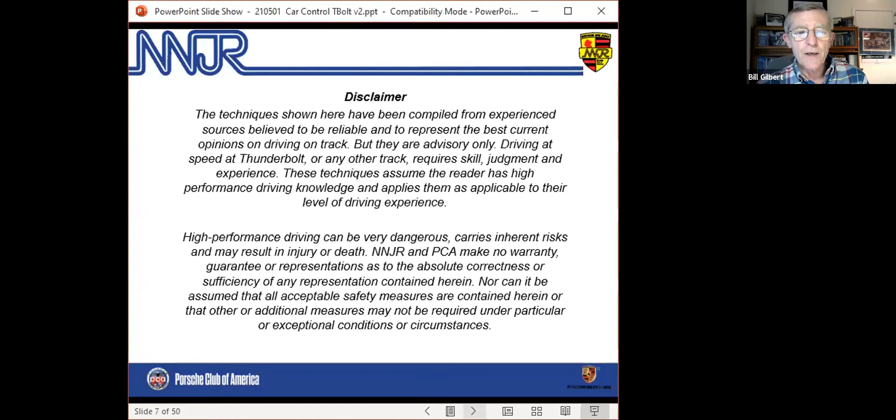Okay, so we're going to talk about car control. Normal disclaimer, anything you try based on this is your fault. So what is car control? You gave actually better definitions than some of the ones I have here, but the car does what I ask it to do, or expect it to do, right?

I love to include the reminder from Dennis Mascio that says, remember, the driver's guiding this 3,000-pound car. You're not telling it what to do, you're suggesting what it should do. You're guiding it. We don't, as a driver, have ultimate control. A car's going to do what it's going to do based on the physics of the situation.

Another way to think about car control is, hey, the car feels good. Well, what is that? What is feel? Well, it means kind of no bad habits. It inspires confidence, it's not scary. And we'll talk a little bit more about that in just a minute.

If we think about what the car is doing, and we think about handling, the classic definition of handling includes three things: balance - does the car feel balanced? Responsiveness - does it turn when I turn the steering wheel? And then the amount of grip.

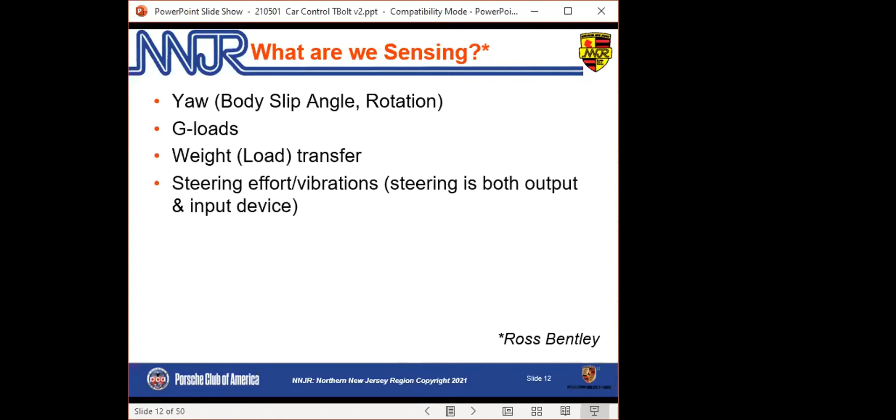Hey Bill, if... I could just make a point of this, Tom. I know this is also a pre to the theme, the Thunderbolt. I know you're going to touch on it, but since we're talking about this feel and grip and so on, I found, and I'm sure you're going to touch on it later, the Octopus is a fantastic place to practice that, because you have understeer and oversteer conditions all built into the entry, the mid corner and the exit of one turn, and it's slow speed, so there's not a lot of risk.

It's a very user-friendly place to practice understeer and oversteer and working your throttle, and you can feel things there. The track - people complain, oh, wears out my tires? Well, guess what, that's exactly a great place to figure out what are the tires telling you. What does it feel like in your butt as you're going through that corner? So I'll leave it to you. Thanks.

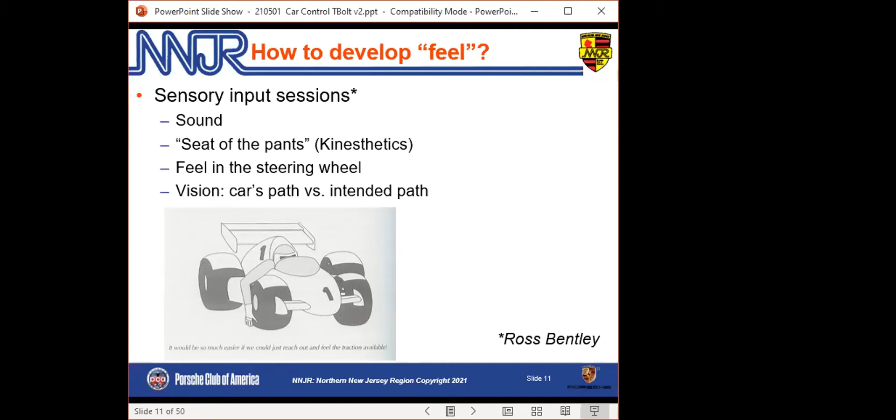No, Tom, that's a great comment. I was going to mention it in passing, but I'm glad you emphasized it, because you said it better than I was going to, and it absolutely is.

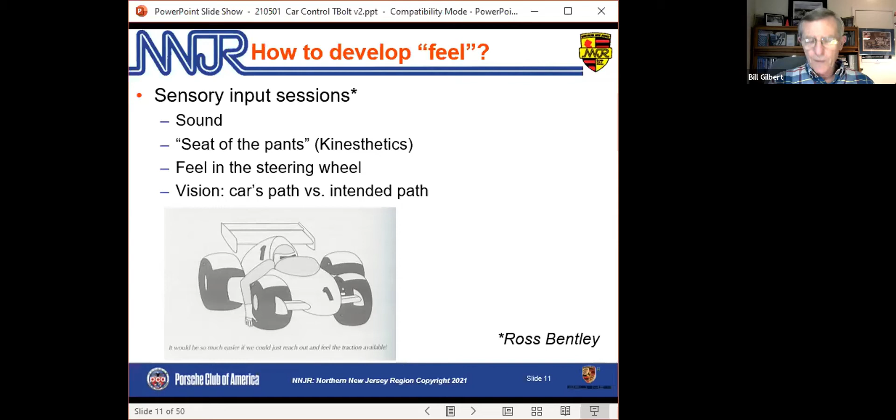Later, I'm going to talk about other ways, other places. There are very few track corners where you can experiment with the limit, and really consciously induce understeer or oversteer and get away with it, or at least that you want to do that. But the Octopus absolutely is a place like that. You can push a little too hard and feel the front end go out, or get on the gas a little too hard and feel the back end go out. So Tom, absolutely correct, I'm glad you mentioned it.

Now, I'm not going to spend any time tonight on the technical aspects of what we're sensing when the car is handling. There's all kinds of things. In the slides I'll post on the website later tonight, there's a long appendix with more information of this type. But if you think about how we know what the car is doing, it's not just the yaw angle or the G loads, there's a lot of other things, and that's where the sensory input sessions really come in.

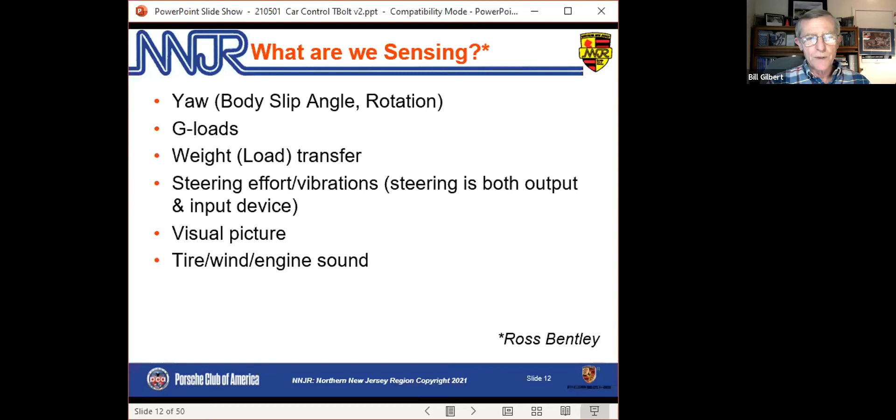I've also been a broken record in the past on deliberate practice, which means practicing in a very organized way: learning the track, learning the car, learning traffic, and then sensory input. If you're learning a new track or just want to get up to speed at an event, this is kind of the sequence you might want to do it in.

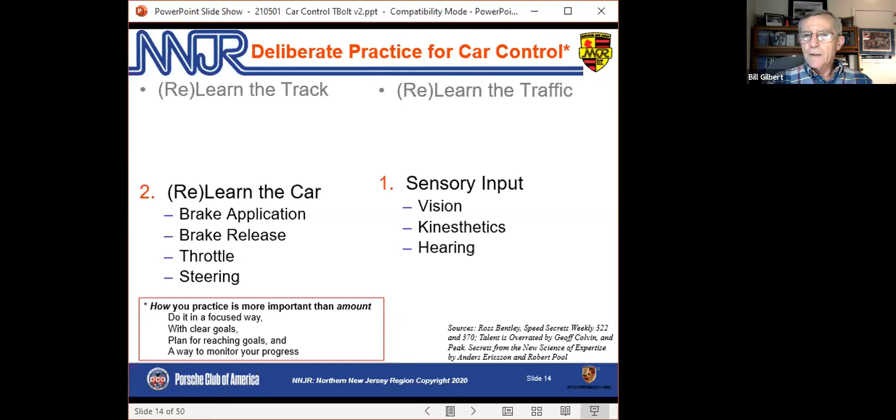But if you really want to think about deliberate practice for car control, the sequence would be different. We would do the sensory input first, with vision, hearing, and kinesthetics. And then we would pay attention to exactly how we're applying and releasing the brakes, the throttle, the steering, and so on. Same idea, you can take the deliberate practice worksheets that are on the website.

I know you can't read the yellow highlights here, but these are the sensory input dimensions of those worksheets. Print out a few Thunderbolt track maps, work on those, take some notes, and you'll improve your ability to feel what the car is doing and know what the car is doing.

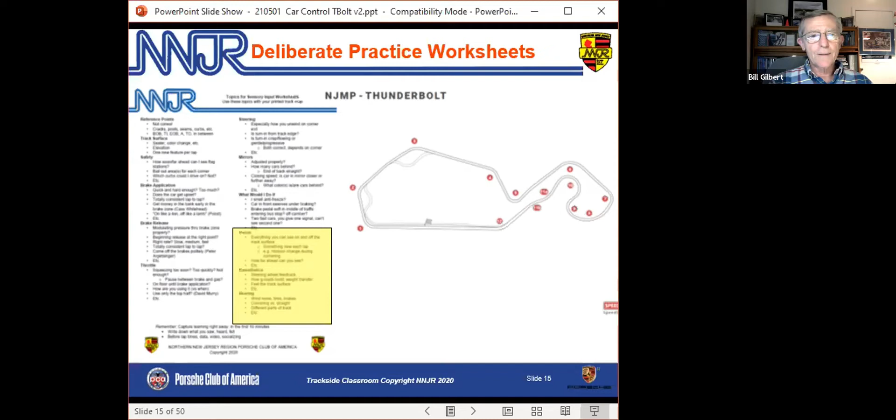And you can't figure out what the car is doing handling-wise unless you're very consistent on the track. If you don't enter a corner at roughly the same speed every time, how do you know whether the understeer was caused by what you did or by something else, if you're approaching it at different speeds, and so on?

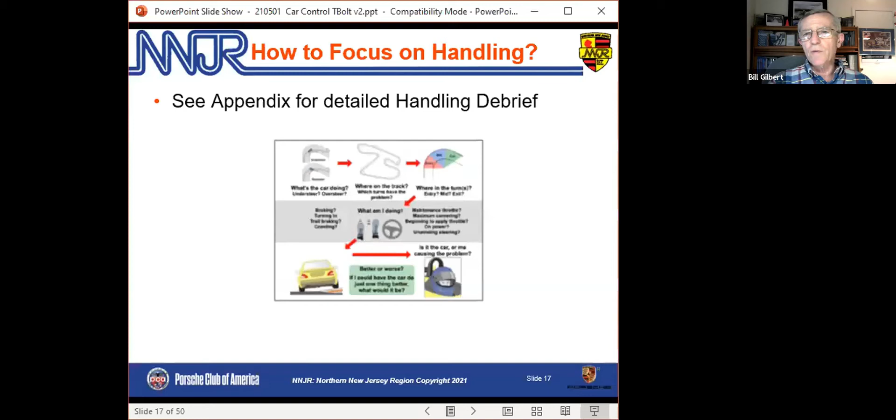If you do have a handling issue, there are ways to diagnose what's going on that are in the appendix. And if you're going to make changes to the car, think about things like balance, and be careful not to just assume that somebody else's setup is the same one you want. In the appendix is a detailed handling debrief from Ross Bentley, a whole set of steps you can go through if you think the car isn't handling right and want to diagnose what's going on.

The simple version of that is: I just came in from a run, was the handling better or worse? And if I made a change, was it better or worse than before the change? And if there was one thing I wanted the car to do better, what would it be? Would it turn in faster? Would it be less nervous? Whatever it is. And you can do this all with deliberate practice.

But this is really more about setup and handling than car control. So let's go back to handling, well, car control issues. Obviously, most car control issues are caused by the driver.

There are all kinds of causes of understeer. We talked about some of these before, right? You can get into a corner too fast, turn the car, and the car won't turn. The classic autocross experience, can easily do that at the Octopus. Get in too fast, try to turn, the car won't turn.

Why is this not going? Oh, I see. If you turn in too fast or too much, again, we're asking the front tires to do too much, and the car will understeer.

There could be too much, or not enough weight on the front tires due to getting off the brakes too quickly. That can happen at turn 5 at Thunderbolt, right? Relatively slow corner, heavy braking area. We come booking in there, slam on the brakes, and then we take our foot off the brakes. And guess what? If we don't do that gently, the front end's just going to wash right out.

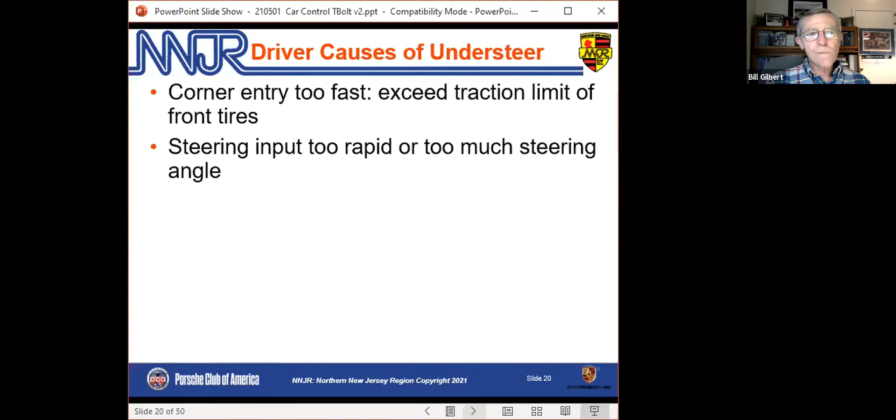Hey, Bill, I just want to interject for just real quick. So for those of you who are instructors on the call, those 3 points are so critical. You can take them to any track, anywhere, anytime. It's how you get rid of that frustrating moment with your student, meaning the student is frustrated and you can't figure it out. You go back to the basics of those 3 points. And I can assure you that 90 to 95% of the time, it's going to be one of those things that you kind of have to systematically go through your brain.

Okay, did they turn the wheel too quick? Did they get on the brakes, get off the brake? Just do your mental checklist and save it for that talk later on. You get in the paddock or at a moment later on when you can fix it. But it's going to be one of those 3 things, and it's so easy to fix. But it's very frustrating if you don't go through that mental checklist and then go through it with the driver.

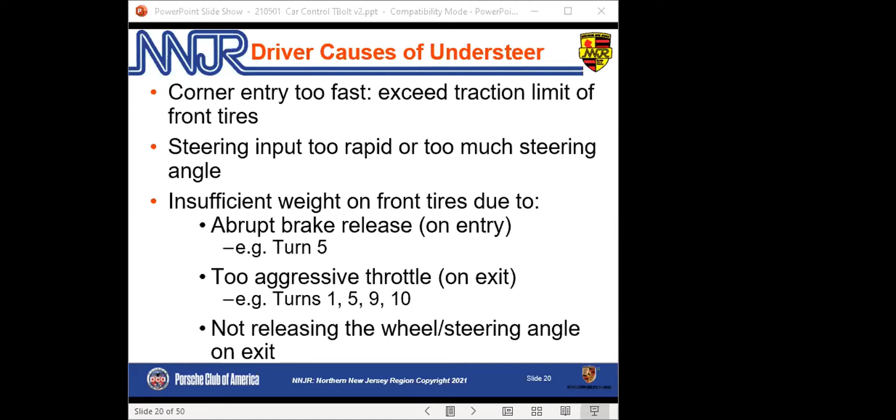Absolutely. And let me reinforce, anyone's welcome to jump in with questions or comments at any time. Please, I don't want this to be one way. So I appreciate Tom jumping in, but anyone else is welcome to jump in, especially if I'm saying something you don't understand or it's not as clear as you'd like.

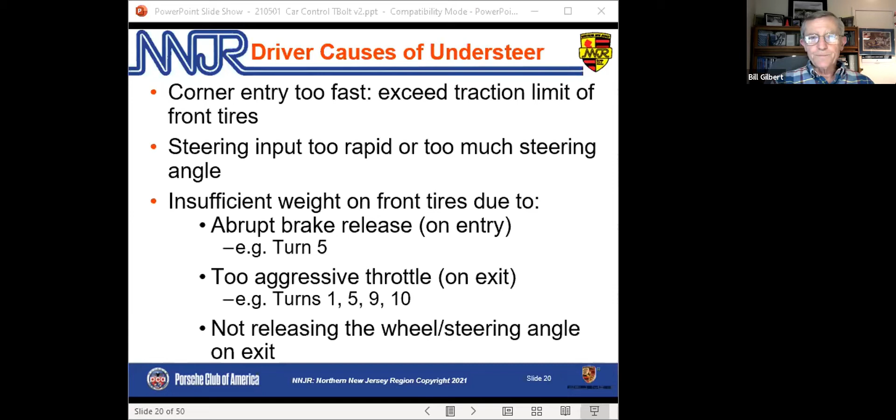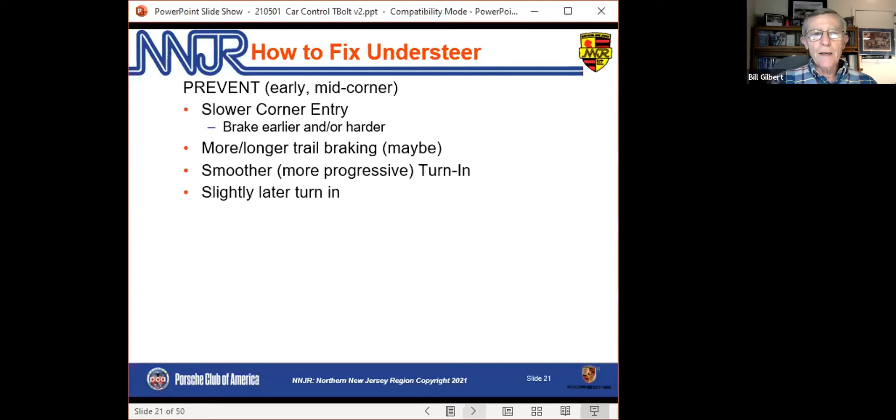So how do we fix understeer? Tom was leading us here. If it's early or mid corner, we can come in slower, meaning brake earlier or harder in a straight line. Perhaps more or longer trail braking will help. Again, depends on the circumstances, right? But often, especially with an inexperienced driver, a more progressive, smoother turn in will help. Maybe a slightly later turn in.

And if it's happening mid corner, then you're getting on the gas too soon. Those of you that were at Pitt Race heard Eric Figueres, the pro who did the track walk for us. He made a comment in the middle of the track walk, I think it was on turn 4, but it could have been any place, which I think is really important. And I've heard it before, but he emphasized it. His point was, when you go to the gas, you should be able to get on the gas hard.

If you go to the gas, but then you have to pussyfoot around and can't really commit to the gas pedal and squeeze it to the floor pretty quickly, then you got on the gas too soon. And that's a really important point. This is just an example. If you're getting on the gas hard, but then the car is understeering, guess what? You got on the gas too soon. Unless you just jumped on the loud pedal. But if you're squeezing the gas pedal properly and the car is washing out, guess what? You weren't patient enough. You got on the gas too soon.

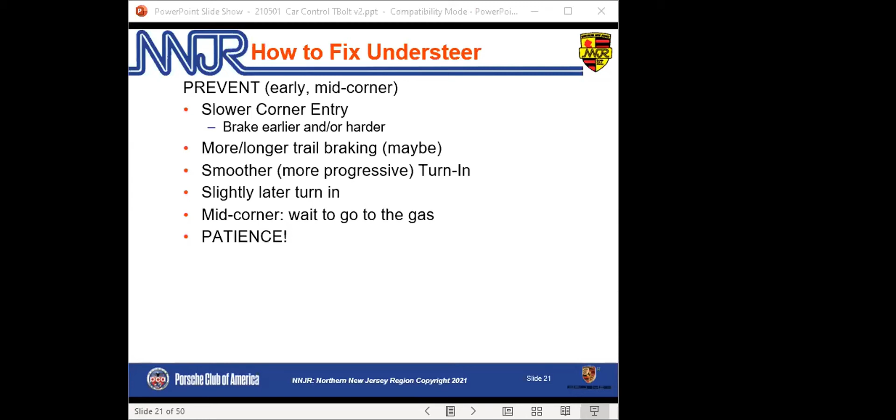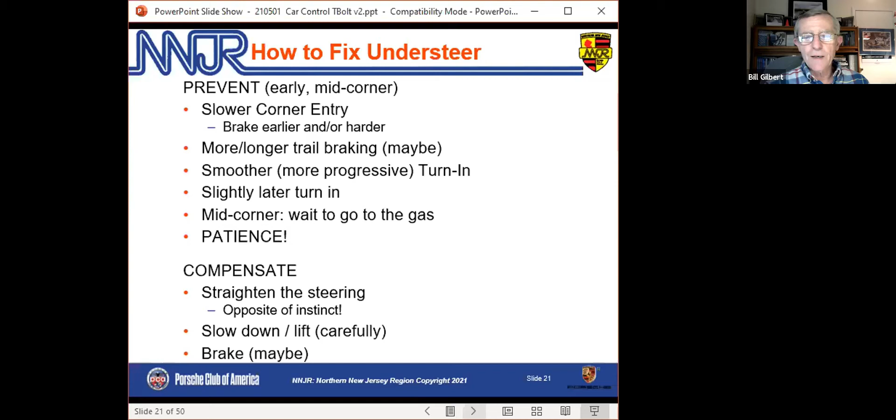Obviously if you're in a situation in the middle of the corner and the car is understeering, all you can do is compensate by generally straightening the steering wheel a bit, which is the opposite of what our instincts are, of course, or slow down a little bit. Maybe if it's a severe case, you might even have to use the brakes, but hopefully none of us get into that situation too much.

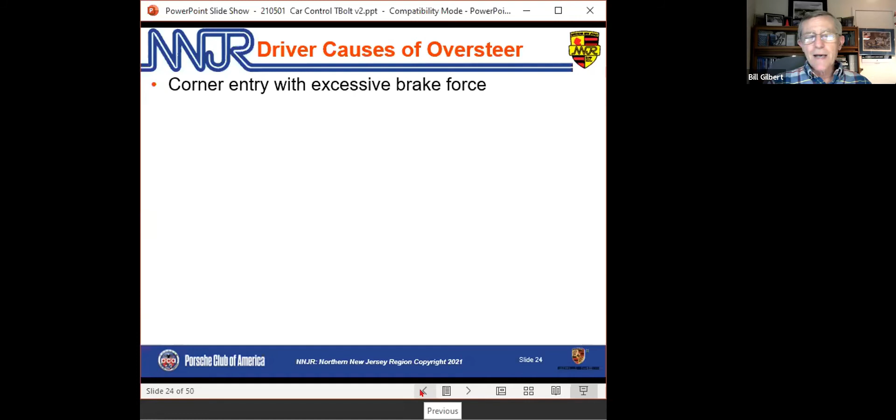It's really pretty cool. So flipping the coin, oversteer. Hopefully this happens less often, but it can happen. If you get into a corner with too much brake and the back end of the car wiggles around, that's oversteer. Turn 5 can happen at Thunderbolt. Turn 9, I imagine the same thing could potentially happen between 8 and 9, actually going in there.

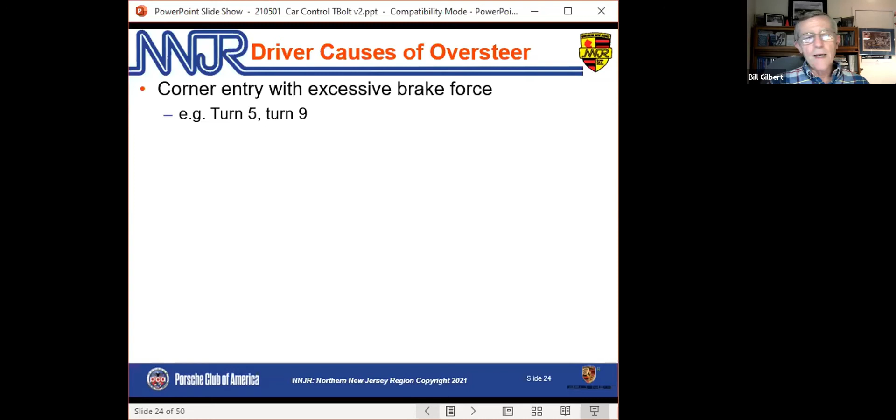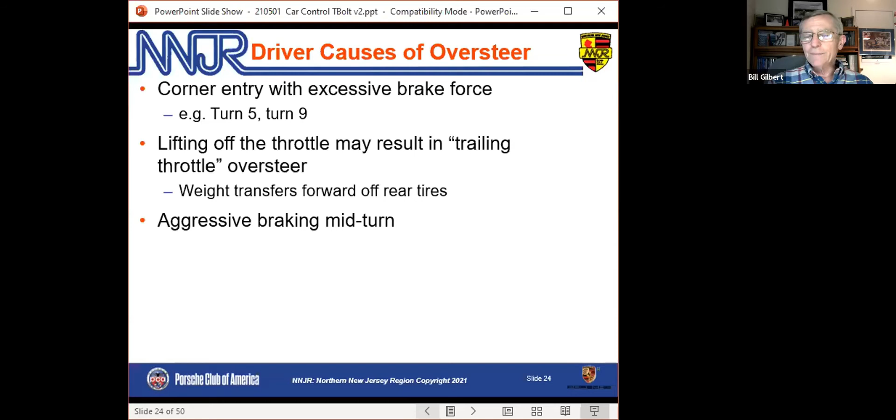We've all heard about trailing throttle oversteer. If you get into a corner and just come off the gas, now we've unweighted the back end, and it's gonna step out as the weight comes off. If you're very aggressive with the braking mid-turn, you can potentially induce oversteer. Sometimes that's actually a good thing if it's a little bit of oversteer—it's never a good thing if it's a lot, because a lot of oversteer is called what? A spin, right? So never a good thing.

Don't have too many downhill turns to worry about at Thunderbolt. And of course, power oversteer—getting on the gas and sliding the back end out. The guys on TV like to do that. It's showy and fancy, it's not fast, and it's not really what we want to do.

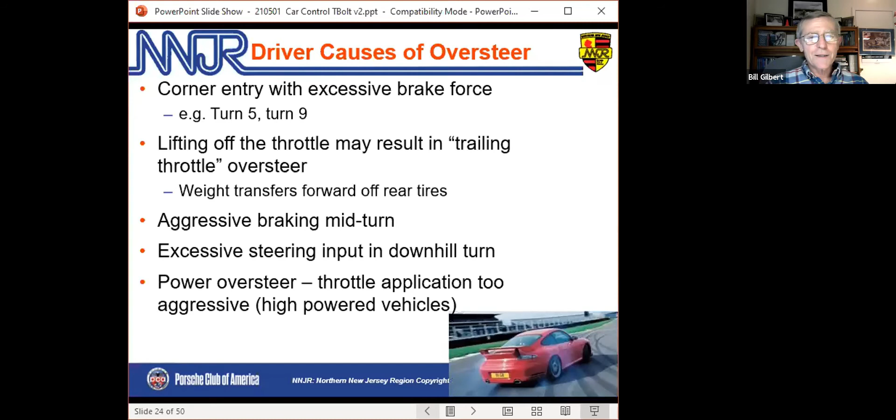So how do we fix it? Generally, most oversteer situations can be solved with less trail braking—never a guarantee—also with a smoother transition off the brakes. Tom was talking about instructing students: a common student mistake is being on heavy brakes and just taking the foot right off the brake pedal, jumping off the brake pedal. Well, that'll certainly step the back end out if you're on too much brake. So being smoother, being more progressive with the steering input can help as you're entering a corner.

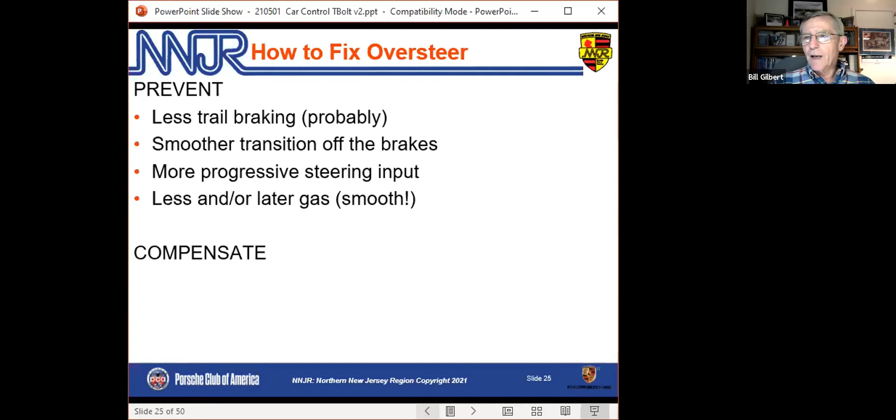And if it's oversteer coming out of a corner, then we have to use either less gas or later gas, or both, and do it smoothly. Now, if it happens in the middle of the corner, everybody knows steer into the skid, but that requires practice, which you can't get on the track, except maybe at the Octopus at Thunderbolt.

Correct, pause, recover—that's where CPR comes from, and it's not something you're generally going to practice on the track, but you can develop that seat of the pants at places like autocross, on a skid pad, at a car control clinic, a winter driving clinic, or even in the snow on a parking lot. That's where these kinds of things can get developed.

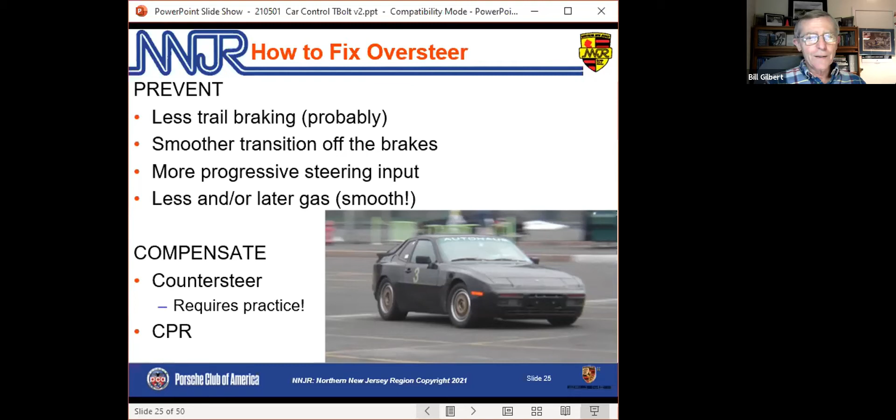This picture on the previous slide, if I can get it—I guess it didn't go back. This picture of my previous car going sideways is in an autocross. So not a great line through that corner, but I at least was correcting the car to get it pointed in the right direction.

So to summarize car control for tonight: we first have to feel or know what the car is doing, and we can always improve that with sensory input sessions. It's really a key part of advancing our skills as we get more experience. If you think about the handling of the car and how it feels to you, you want to think about all those factors we talked about before, and there is a way to get organized on that if you're concerned about it.

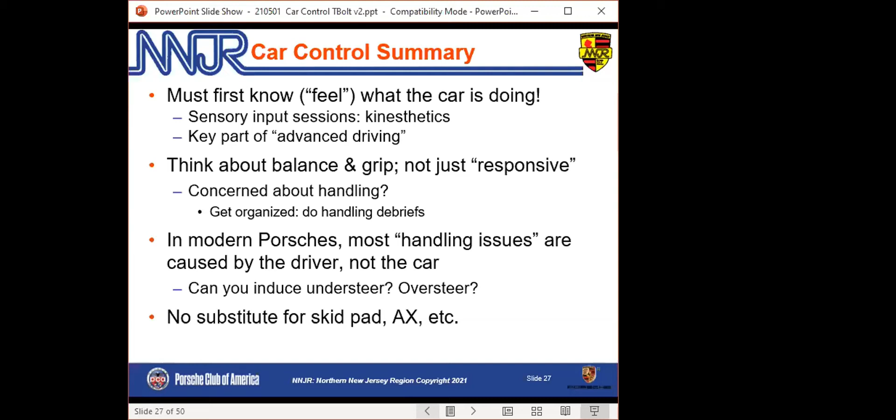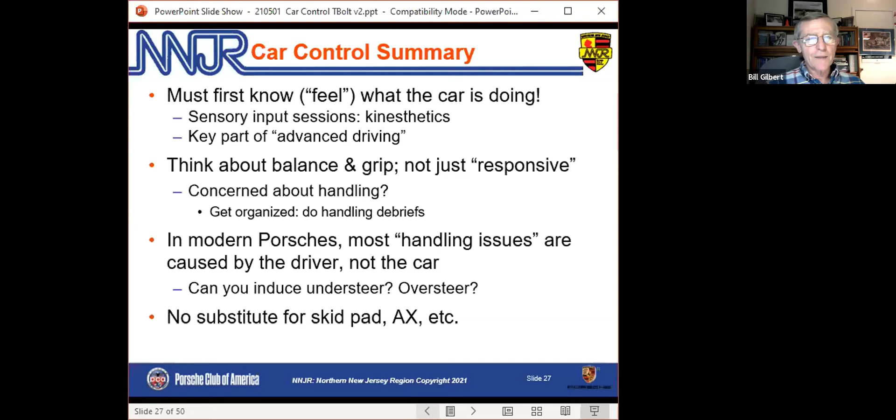But we all know most handling issues in modern cars are caused by the driver, not by the car. And if you don't know how to induce oversteer or understeer, that's something to work on—look for a skid pad, try it at the Octopus, or other safe places to try it. That high-speed corner is the last place we want to develop those skills, but there are ways to do that.

So with that, questions, comments that folks have on what we just covered. Hopefully some of that made sense. But questions, comments, suggestions, ideas?

So Bill, turn 16 at Pitt Race—I went through there a few times, terrified. I was speaking to someone and they suggested that I may have been turning in too early for that. The car felt light and just not super planted. And, you know, I was in fifth gear going through there. I was moving pretty good and it wasn't a good feeling to not be 100% confident. I don't know if it's bravery or technique or setup.

Well, Tim, it could be setup, but I doubt it. If the car didn't feel planted, then one of two things. First of all, those of you that weren't at Pitt Race, turn 16 is a kink in the main back straightaway, taken very fast, as Tim said, in fifth gear in his car and in my car. So it is entirely possible you were too early, because in that corner we want to either go over the last half of the curb or alongside the last half of the curb. So it's a relatively late turn-in.

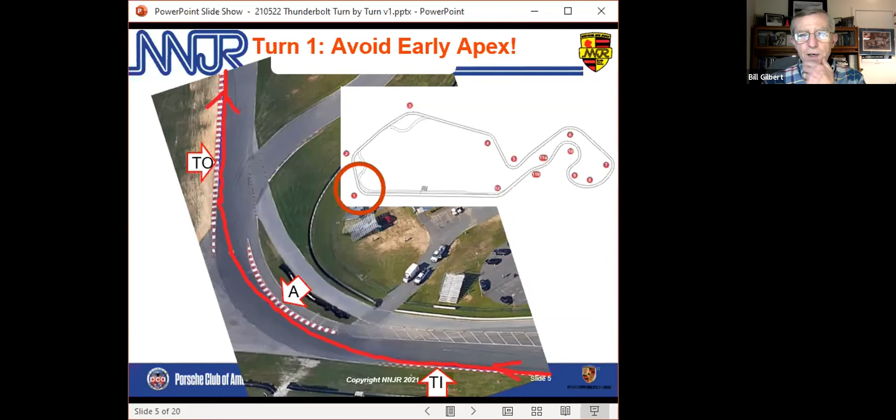As I'm going through here, if you have questions on any given corner, I'm going to go fairly fast, but please jump in with comments or questions as we go through.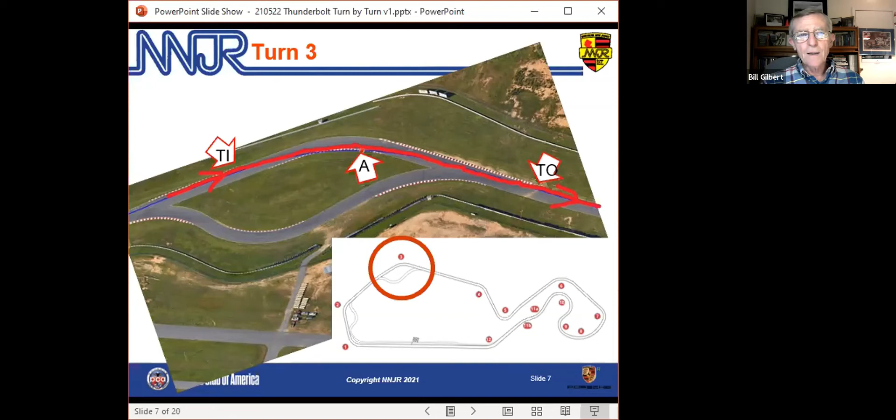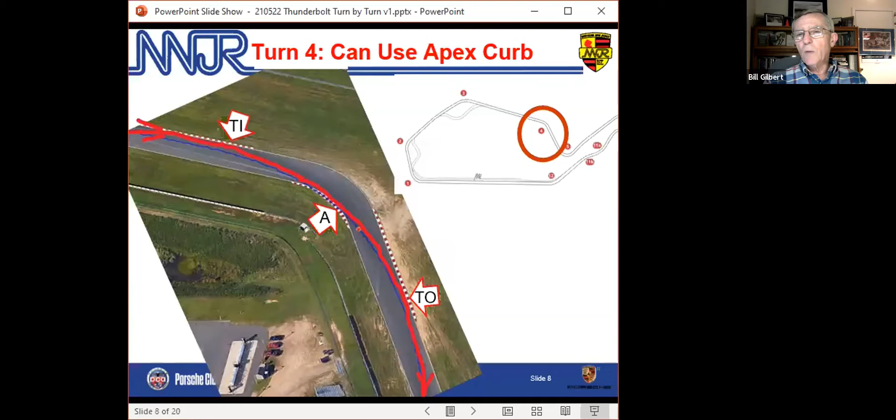So when we get down to this area, we're tracking out, but there's not a lot of real estate between here and 5. As we're going to see in a minute, that's going to position us so we won't be track right entering turn 5. But for most people, that trade-off is one worth making.

And here's turn 5, the one that lots of people overdrive because it's slower than a lot of people think. And it's a bit downhill going in, so that doesn't help either. There's nothing particularly fancy about this corner. It's a 90-degree, roughly left-hand corner, but we're coming into it very fast, and that means we got to slow down a lot.

And there's this nice long stretch after it, so we want to exit the corner fast. So this needs to be a slow in, fast out corner. So lots of brake.

As you can see, the line that we've drawn here, we never got track right. Normally, we'd want to be over here by the turn-in point, right? Yeah, by the time we got to this point. But if we carry speed through 4, that's not possible.

Yes, you can go through 4 slow enough to end up track right, but the trade-off isn't worth it. And so almost everybody drives this to no more than the center of the track in this section, turning into what's a late apex on this curb for 5, from the middle of the track, and lots of trail brake here. Yeah, we're scrubbing off speed. We can trail the brakes a fairly long way into this corner before we get on the gas to come out.

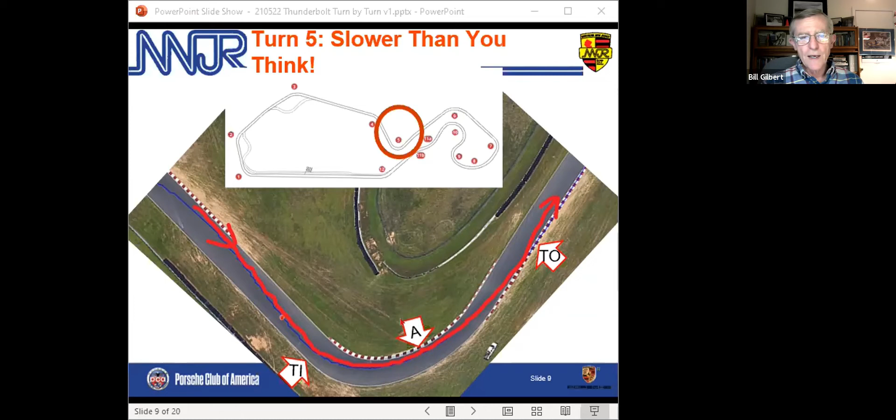If I can get this to move for me. Yeah, thanks, Bill. This corner here at 5 is one of those.

I think you brought us like 2 really good points. When you want to travel through 4 at a higher speed, the temptation to try to get all the way track right for 5 - avoid it. Students will typically do it. Oh, I got to get back to the right. No, you don't. And they think about it like, oh, I got to get back over to the right side, and everything gets discombobulated.

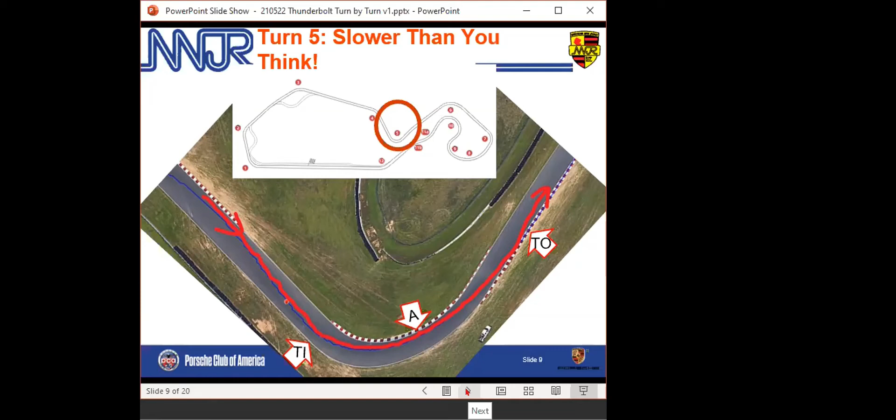And a number of people will call this turn 5. I call it the autocross corner. But you do have to understand, going in slow, coming out fast, and that late apex. And that's one of the real special points about this corner when you're teaching students.

So here's an overhead of the whole complex. I guess I should have drawn the red in, so it's a little bit hard to see. But from here, you can see that the distance between 4 and 5 is pretty short. So if we come booking through 4, it's physically impossible to get back.

And the speed difference between being able to book through 4 fast and end up mid-track versus slowing down enough to end up track right - the speed difference in 4 is pretty substantial. So unless you were driving a really low powered car, and even then I'm not sure, because in a low powered car, the line that's here is shorter than getting back track right as well. Anyway, this is a bit of an unusual circumstance, but not really when you really analyze what's going on.

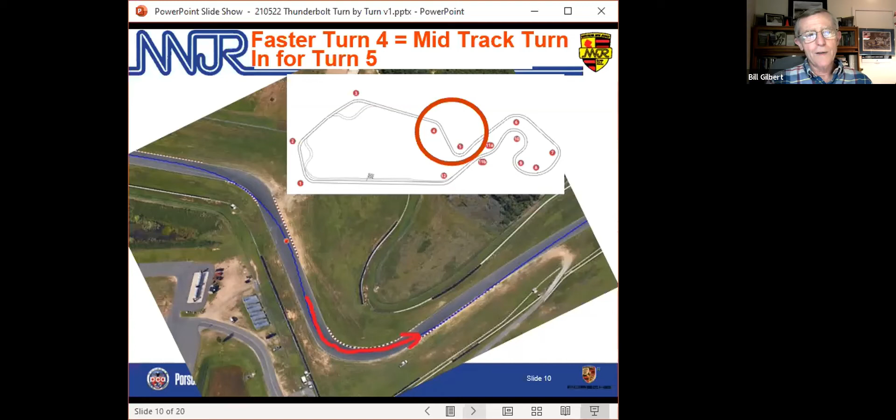6 is another fairly fast right-hand corner. And I want to emphasize here, and should have on probably some of the earlier ones, the apex here is fairly long. It's not just a point in the middle of the curb. We're going to run along the curb for some distance, 10 or 20 feet or whatever, maybe more, because we're going to brush the brakes, or a little more depending how much horsepower you have, and then we're going to turn the car back in and start to squeeze the gas. It's a fast corner, and we're going to smooth it out as much as we can.

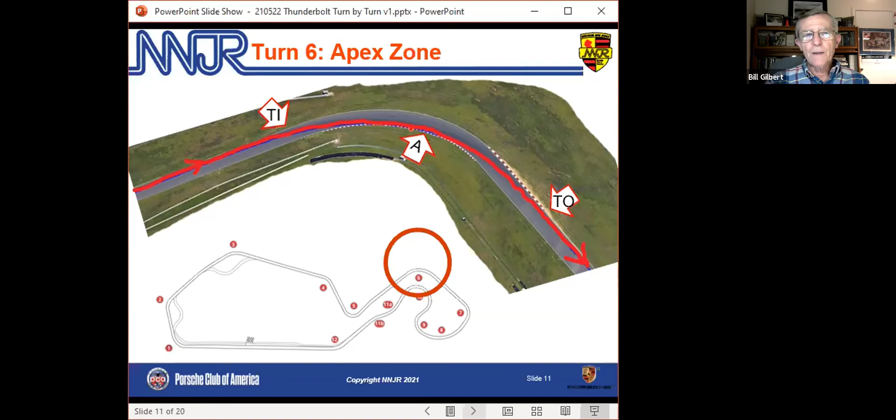It may require a little more brake than you at first think. At first, you think it's faster than it is—at least that was my reaction when I first drove it. But it's still a quick corner. You can still get through here at a very good pace.

Now this gets into the whole area called the octopus, which most people think of as the area around turn 10, and 9, 10, 11A. But this is the whole complex seen from above, starting with 7, which kind of sets up 8, 9, 10, and 11.

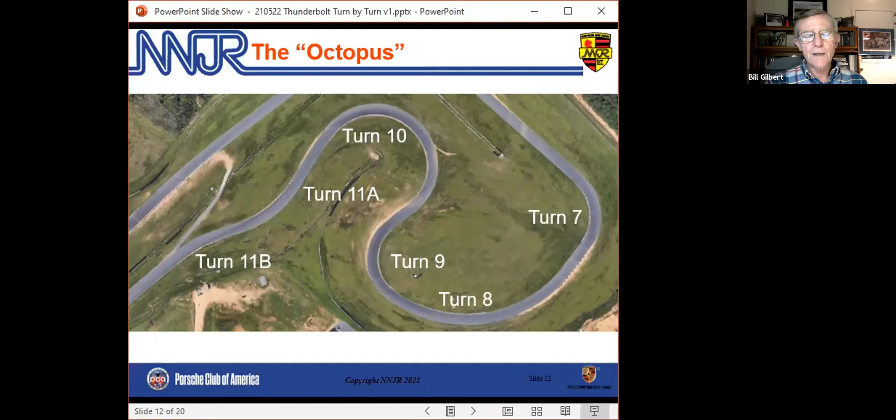So 7 is another apex zone. This is a bit slower than 6. We're going faster than we were coming into 6, and it's a right-hand corner, but it is slower. Notice it's almost 90 degrees. So it's a slower corner than 6, but still not a slow corner.

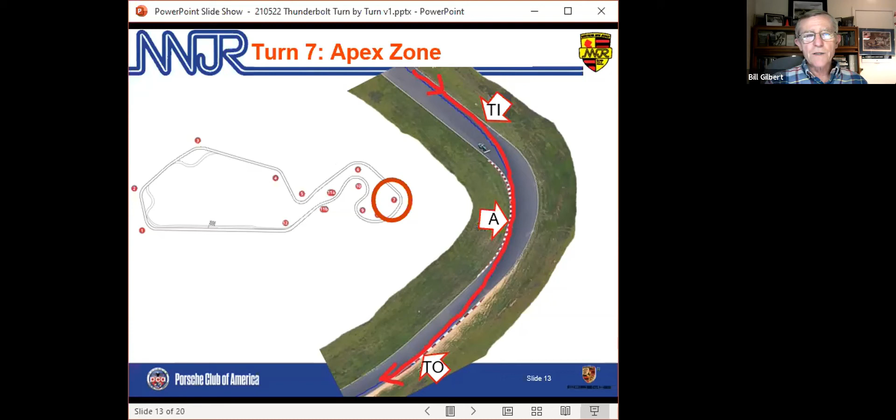The interesting thing here at turn 7 is that we really want to exit this and make one big arc all the way from 7 over to 9. So this is a fairly quick section, but it takes some getting used to because it's not straight. In particular, when we get over here and we want to slow down, it's hard to figure out how to brake.

So there are several strategies that can be employed over in here. One is to straighten the car out a bit and brake in a bit of a straight line before turning in for turn 9. Another is to just trail brake gently for a very long time. 9 is a very slow corner that we're entering. 8 is this kind of big arc, so I almost don't even think of it as a corner—I just think about how do I get from 7 to the braking zone for 9.

But thinking about what our braking zone is going to be as we get over here, and how we're setting up 9, a very slow corner, is what this section is all about. Depending on how fast we come through here, that's going to influence how our car behaves. Think about car control—if you're comfortable slowing the car down a lot with partial brake while turning, then you can slow the car down on this line right here.

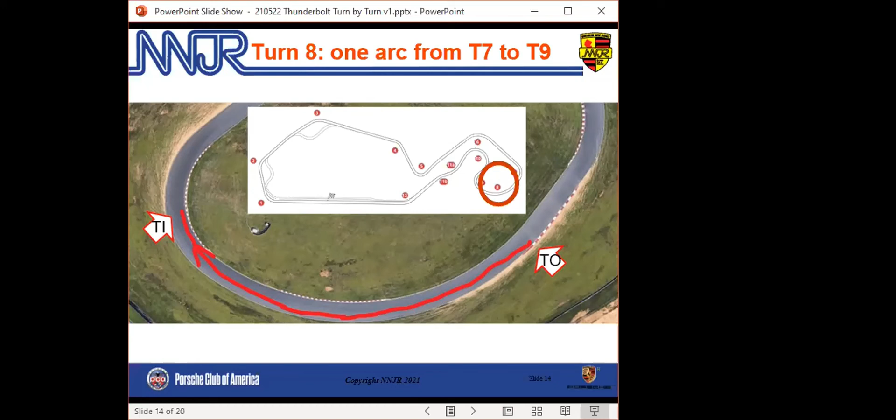Yeah, just a quick question - in turn 9, is it not a little bit off camber if you go out to the right, the left side? Is it off camber a bit, if I remember? Turn 9?

Well, let me go to turn 9. I don't remember - it's certainly not helpful out there. So whether it's off camber or not, I don't remember, to tell you the truth, but there is absolutely no reason in the world that we want to be track left here as we get into 9, right?

This is a very slow corner, especially since we've now just finished a whole bunch of fast corners. It catches people out and people want to overdrive it. But we really just want to follow this curbing around. Let me back up for a second here and look from the overhead at the whole complex.

This is turn 9, and we're headed down here. The natural way, if we just wanted to drive 9, ignoring what's after, and we thought there was a straightaway after, we'd apex it somewhere back here, get on the gas, and end up over here someplace.

But notice how much the track comes back to the right here. This is a sharp corner when you consider how much it comes back, way over 90 degrees, probably close to 120 degrees by the time we're done. So that's the reason why we want to stay along this curbing for a long time before we can eventually make a straight line down to this apex.

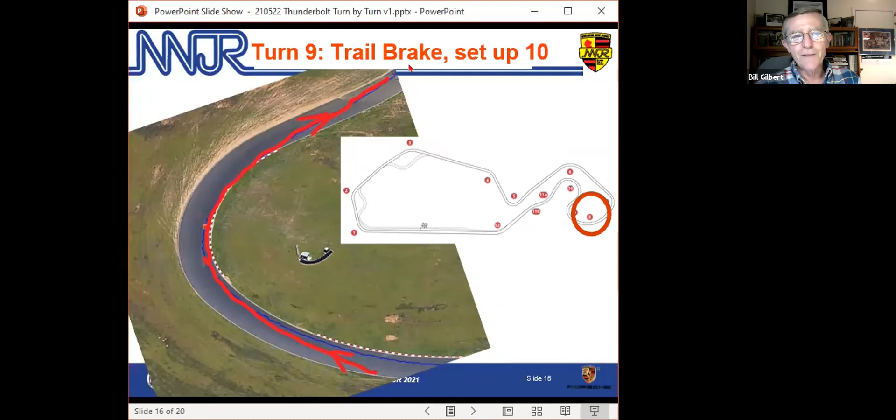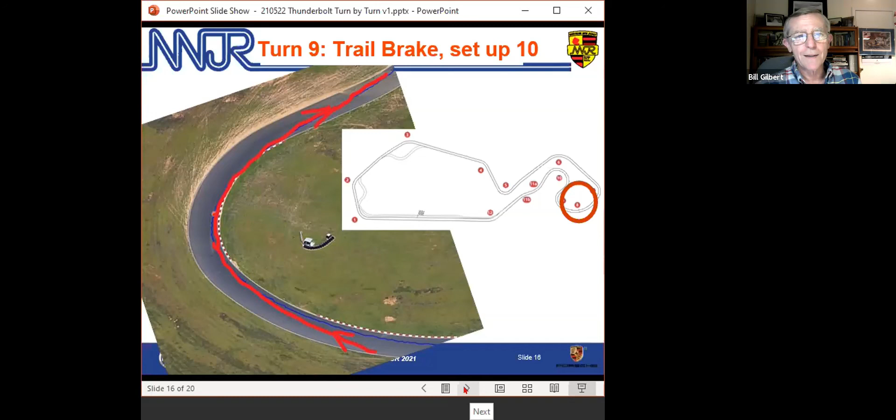Because we're traveling more distance, we're making the corner sharper. So that's why the line is, if you will, odd to think about in turn 9 — we're basically following this curbing all the way around until we can see the beginning of turn 10. When people first come to Thunderbolt, they overdrive this corner thinking they can make some speed up. Well, that doesn't work.

You can see that here in this overhead of 10. We want to approach it in a straight line from the exit of 9, and we're pretty much going to hug the curbing around here as well. There's not much percentage in getting very far outside of this curve.

Some drivers will be way over in the right-hand half of the track here, trying to get the car turned and pointed up the track more. But notice, this is a long corner, and it's even worse than that because of where 11A is. So the line here really is pretty much around the curbing.

And to Tom's earlier point, you think about this from a car control point of view — what does this look like? It looks like a big skid pad. You can easily experience understeer and oversteer and feel how well the car is balanced going around here, because if you get on a little too much gas, the front end's going to wash out. You get on way too much gas, and you'll slide the back end out.

So in this diagram in particular, you can really see how much it looks like a big wide skid pad. To your earlier point, Bill, unless something changed — I myself didn't drive it for a few years. Last time I was there in a fully modified Boxster race car, I noticed that very close to the curbing, or right on the curbing, at least in that particular car, there was a significant amount of grip very close to the curbing.

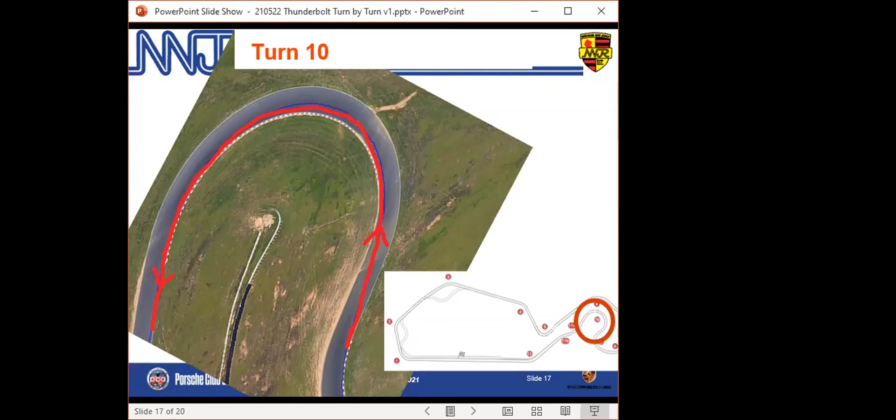And quite frankly, it felt like the car was on rails. The further I went out to the right, I felt that I was losing a little bit of momentum and also less traction. But it's a little bit of a foot right, or two feet, or whatever works for the car — a little bit of experimentation. Absolutely, as you were saying, and Tom before, the skid pad and throttle steering is going to be very important in this turn.

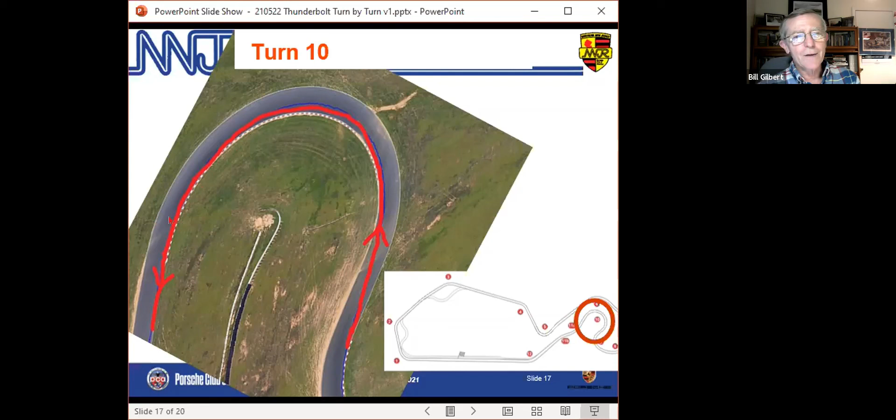I think your point about if there is any favorable camber or whatever, it's certainly over in this area here. If you look at the tire marks in this section of the curbing, the curbing's all black typically in here because everybody's running right up on the curb. So it certainly felt to me like the most grip was right in tight here, less obvious through here, but this is pretty flat.

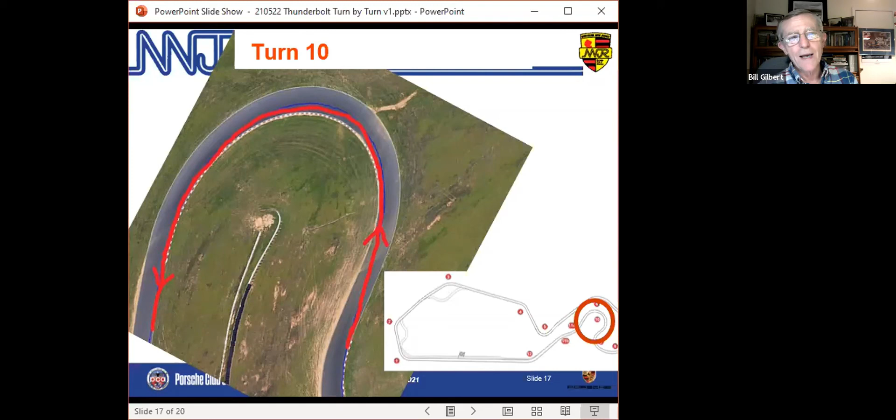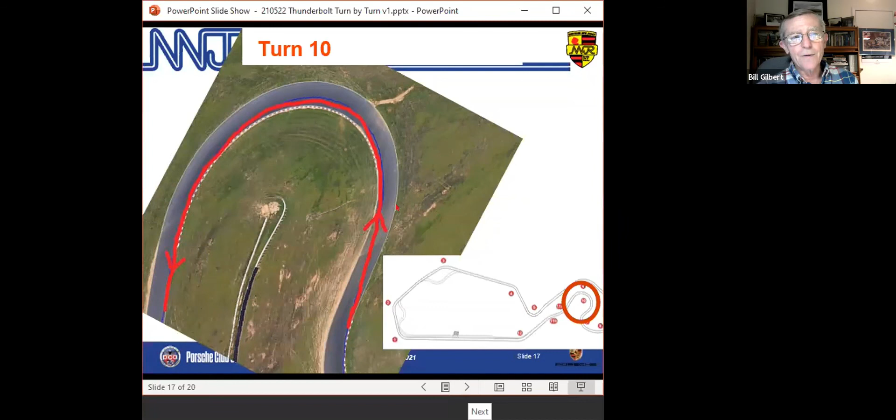There's not much favorable camber either way that I remember, and so there's certainly no gain being out here that I'm aware of. You're just going more distance, making your life that much harder, in my opinion.

Pointing out the black tire markings in general, not just for ourselves as good marker points, but for the students to support what you're trying to teach them. It's fairly obvious where the racers are putting the cars. It's very easy to spot them and show them, and that can help memorize better, especially in the early runs where there's so many things to remember.

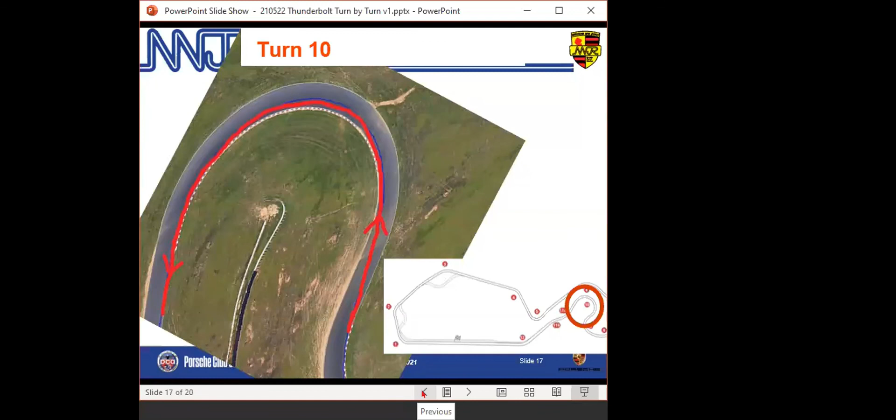Let me back up. I want to point out that one of the reasons we hug this exit curb longer than we might think in turn 10 is notice what happens in 11A. Before 11A, the track continues to come back on us past this curb. So if we started to accelerate hard exiting out of 10, we end up over here, when in fact we want to be track left to set up this complex. This is another case, just like 9, where we have to hold the apex longer than we might think, because of the section that follows, which is 11A and 11B, since this sets up the whole front straight.

To enter 11A properly, we need to be track left, which means we need to hold that apex in 10 much longer than we might think before we get back on the gas. And if we do that properly, now we can be on the gas through 11A and 11B and set up the front straight. So it's a whole series of connected corners, and you have to work backwards to understand why the line is where it is.

My observation from driving the Octopus was this is where people who have a little more car control experience, like the autocrossers, have a slight advantage because they understand the interconnectedness of the corners, plus being able to use their throttle to get around there. This is what separates the autocrossers from the track drivers. Well, I won't disagree with that. Certainly autocross experience helps the first few times you see this, for sure.

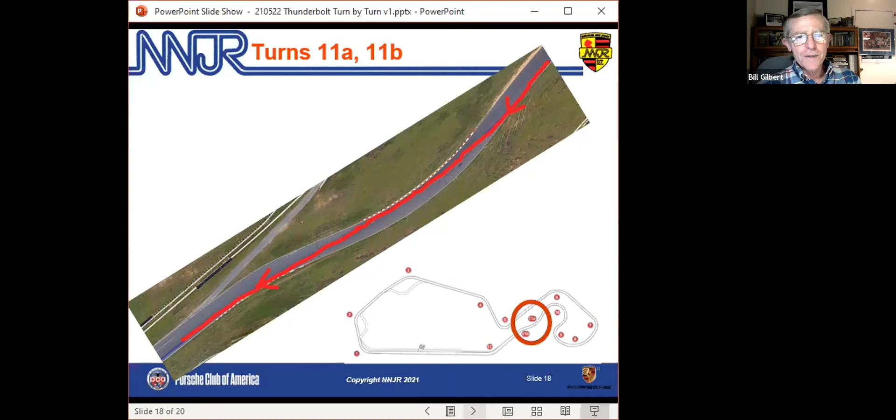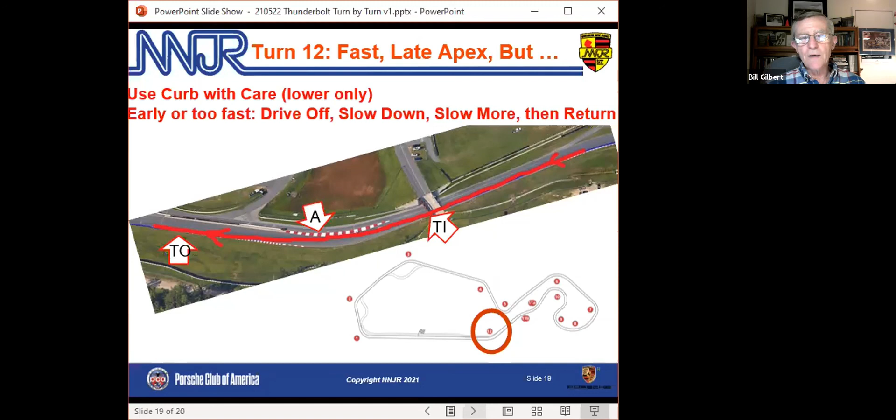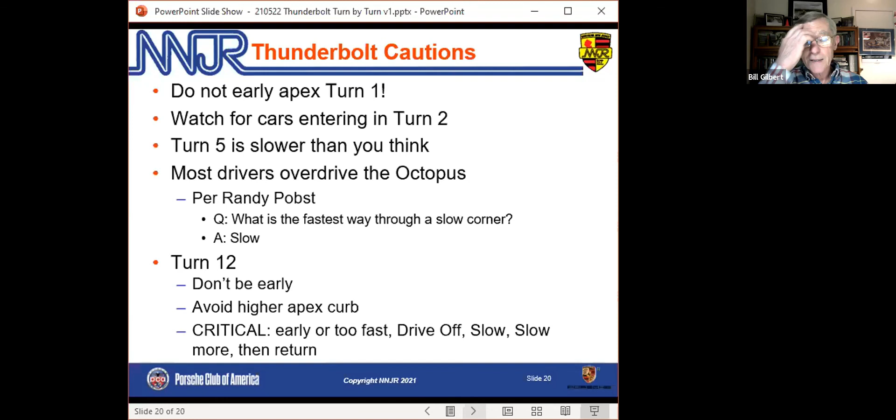Turn 12, don't be early, watch out for that high curb. And any place on Thunderbolt, or any track for that matter, if you're early or too fast, just drive the car off, slow it down some more, then count to 10, and then think about coming back on. But everybody on this call should kind of know that.

So with that, questions, comments before we wrap up?